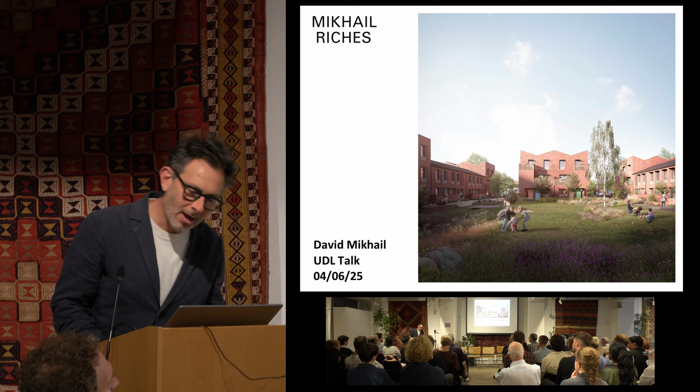I'm David Mikhail, Director of Mikhail Riches Architects. I'm going to try and keep this to 10 minutes talking about three councils building social housing: the City of Norwich, the London Borough of Hackney, and York City Council.

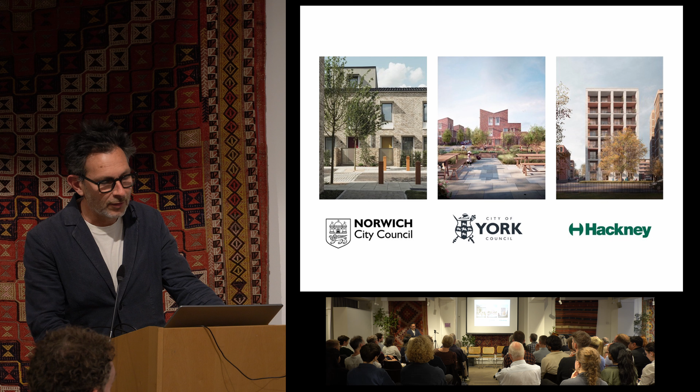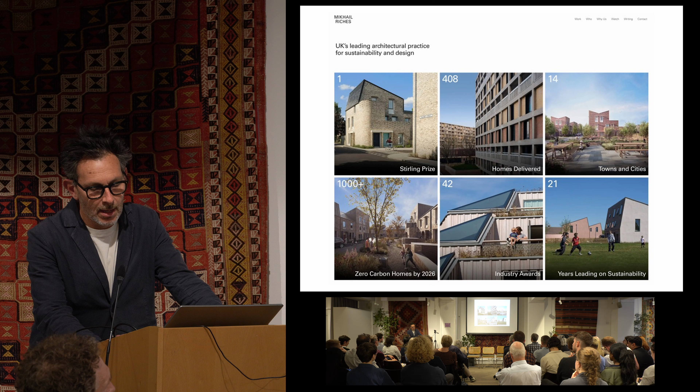This is us, Mikhail Riches, and it's probably no accident that most of our best work has been for local authorities. They seem to be the ones asking much more of their housing than most house builders. I think for local authorities, new housing can shine a light on the art of the possible, but specifically it can also meet local needs.

This is Goldsmith Street. I'm going to talk for a few minutes about this. I've got no photograph as charming as yours, Leo, but this was started in a competition we won in 2009, an RIBA competition. We were thrilled to win it.

Accordia had just won the Stirling Prize for private housing in Cambridge. I remember the first client meeting with Andrew Turnbull, our client, in a pub in Norwich, where he turned to me and said, 'We're expecting you to win the Stirling Prize, David, right?' I said, 'You're joking, right?' It was with great delight that we were able to win it many years later, in 2019.

But in 2012, the project was pulled because Lehman Brothers happened. We all remember that, I hope. Their development partners tried to value-engineer the scheme, tried to chuck us off. A scheme was tabled with cul-de-sacs and PVC windows, and luckily for us, Andrew and Norwich decided to put it on hold.

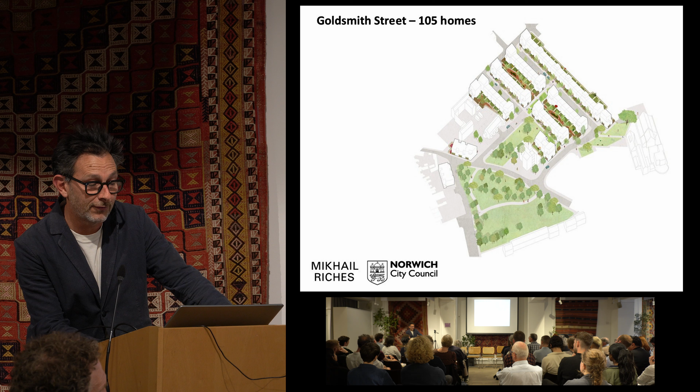Till 2014, when we got a call saying it's now just council-led. There are no development partners. It's just the council, and it's all going to be socially rented. And could you make it fully certified passive house? I was like, yeah, of course we could. That'd be lovely.

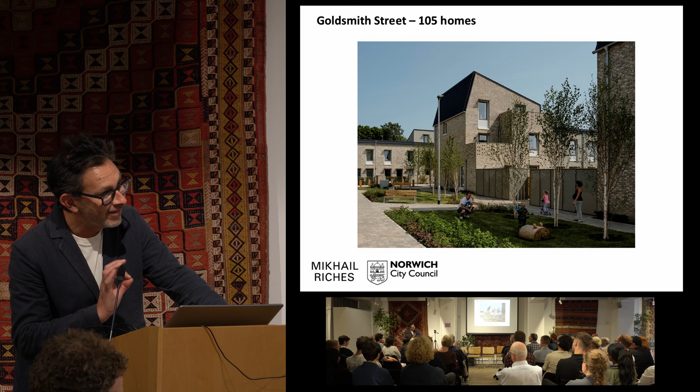Andrew, interestingly, had a conversation with his team about how to deliver this, and decided that, unbelievably, a traditional JCT contract was the way to ensure quality and to deliver passive house, which requires quite a high degree of skill. We were able to deliver this project using a JCT traditional contract, not Design and Build, on time and to a budget of £1,825 a square metre, for incredibly high quality build and for the kind of air tightness that gets you passive house.

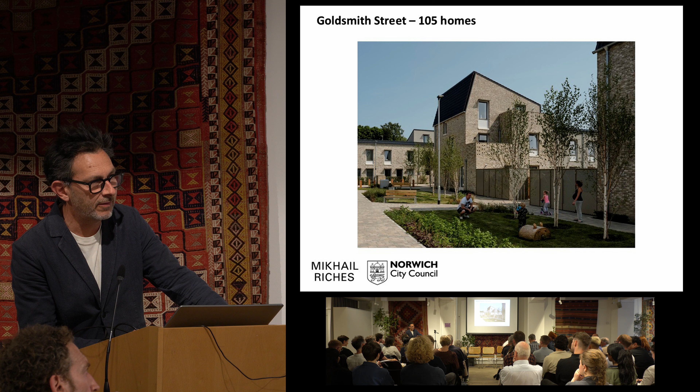So I won't dwell too much on Goldsmith Street because I think we want to talk about other projects, but Goldsmith Street, as well as being fully certified passive house, also has a very strong focus on placemaking, with 14-metre wide streets, unusually narrow, but very much in line with the historic grain of Norwich. And many socially considered spaces such as this, which is a kind of glorified ginnel for taking bins and bikes out, which we formed into something a bit more generous for children to play and to meet. It's actually one of the most successful spaces in the whole project.

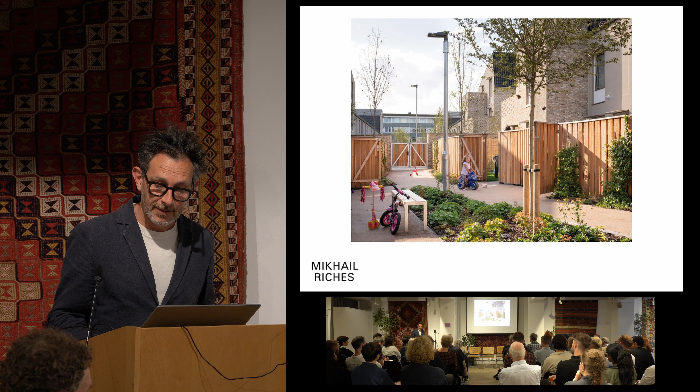To meet the density of the brief, which was 84 dwellings per hectare, we really had to combine houses with flats. But we wanted to provide flats which were like big houses at the end of terraces rather than blocks of flats. So we developed typologies where there are no communal staircases or lifts. Every flat above ground floor has its own front door onto the street. That keeps service charges very low. It means every resident, whether in a flat or a house, has a really generous area of storage on the ground floor for bikes, shoes, buggies.

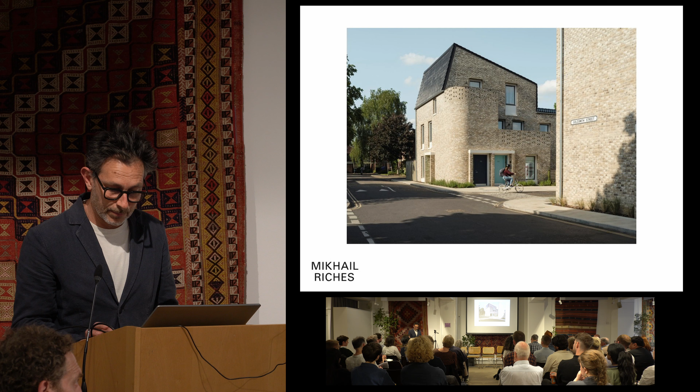So that's Goldsmith Street, finished in 2019. I'm going to move on to Hackney. In 2017, we were invited to compete for a couple of car park sites for the Hackney Housing Delivery Programme. All the sites we looked at here were close to tower blocks, with very strong local communities, and the site, Buckland Street on the left, had a series of amazing plane trees.

Buckland Street and Wimborne Street combined deliver 113 new homes for Hackney residents across 2 sites. I think it's fair to say they're 50% affordable, a mixture of socially rented and so-called affordable, and the rest are private sale to help pay for it. But the mayor at the time made a promise to residents that he wasn't going to build on green space, so this is all car parks and asphalt that we're building on.

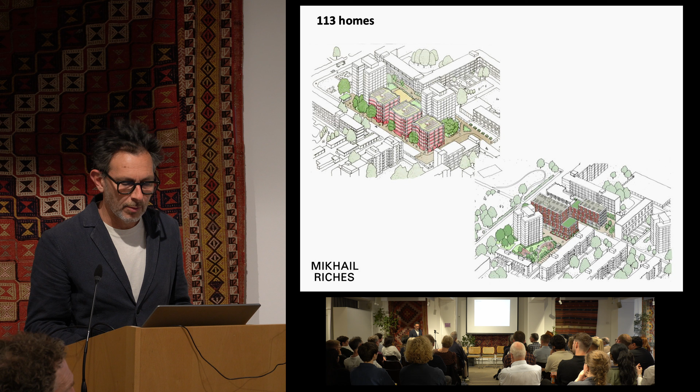So, we struggled long and hard with the brief, which called for a certain number of homes on a very constrained site, and we really wanted to keep those trees because they're so lovely. But space was tight. To the south is a tower block that you saw earlier in the photograph.

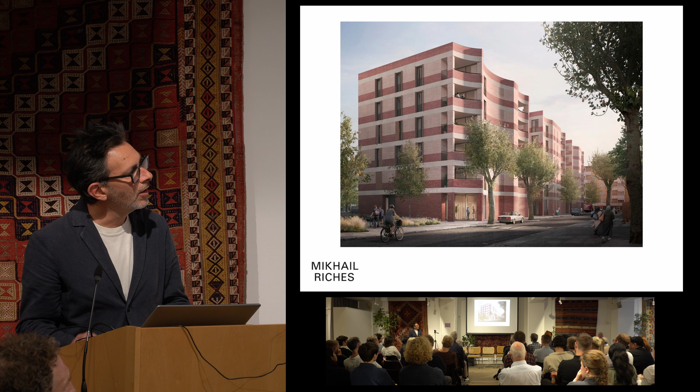So to optimise the site, to keep the trees, to give every flat dual aspect, we came up with a series of mansion blocks, if you like, 3 of them, all of which kind of gently curve around the root protection areas and the crowns of the existing trees.

Now this is a recent video, let's see if we can play it. That's from site a few weeks ago. So these projects are all on site now, due to be delivered this year and next.

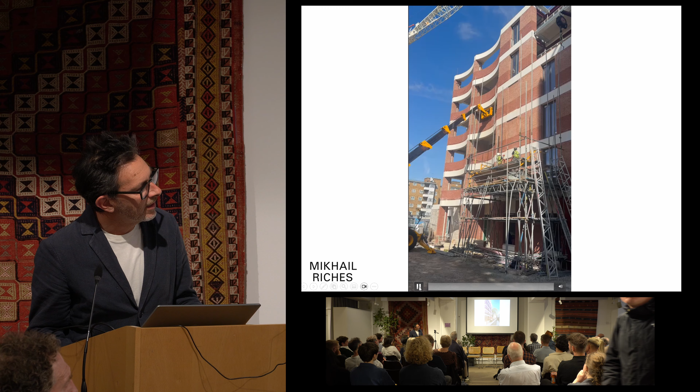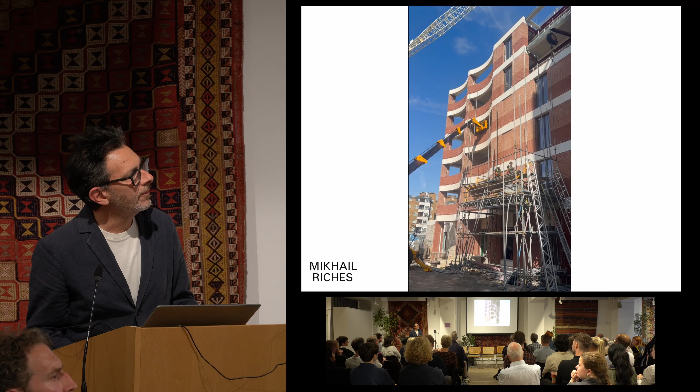So that's the south-facing facade, and this is the north facade coming up, which is curved around the trees. Prefabricated brick on concrete factory-made panels, delivered and craned on site, which has led to some masticing challenges, but anyway, there we go. I'm really excited by this project.

Oh, no, don't want that. Next one. So the other, Wimborne Street, is currently on site.

Also, here we had the opportunity of building flats overlooking Shoreditch Park. Again, sitting back from an existing tree, trying to reduce the sheer decibels of New North Road, a noisy street, but also by sitting back we were able to reveal a really lovely building you can see on the left on the corner of Wimborne Street.

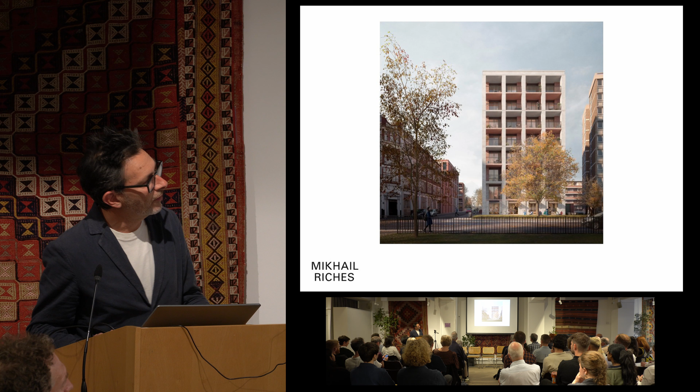So that's Hackney. I've only got 10 minutes, so I'm going to be really brief. This isn't the time for deep diving. We were on holiday when we spotted the brief for this, the most compelling brief we'd seen in a long time, so we ended up spending a holiday working through the tender questions, which you can imagine was a delight.

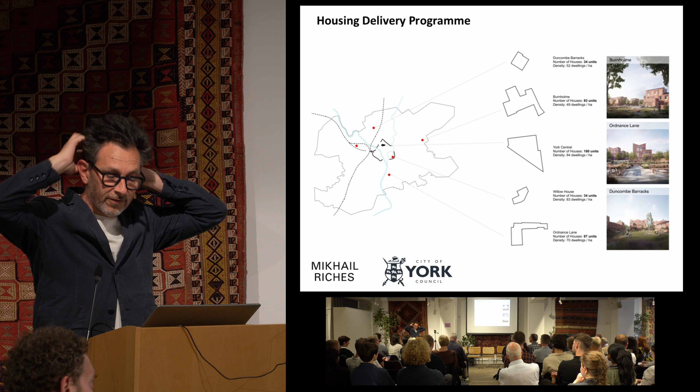But it was 700 homes across multiple sites. We would be, if we were chosen, one architect-led multi-disc team with our own team put together to deliver for York's housing delivery programme, headed up by Michael Jones, who had previously been with Rowntree, delivering Derwenthorpe, another lovely project.

We were so energised by the questions, we actually enjoyed writing the bid, would you believe?

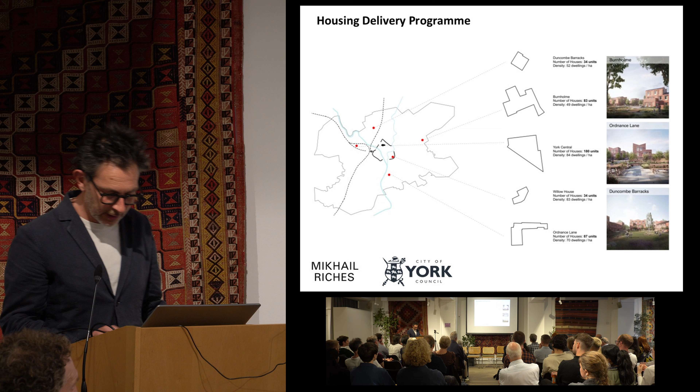And our first task with them, interestingly, wasn't to design anything, it was to help them compile what they call the design manual, which was seen as a short, pithy document which would set the bar for the York community of developers and housing associations.

Newly elected Green councillors in 2019 then influenced the brief too. They asked for us to see if we could hit net zero carbon in operation all within the red line boundary. Incredibly challenging. And that's based on the RIBA and LETI model of net zero.

I'm going to walk you through some of the schemes now. This is Duncombe Barracks. It's a square site. We've developed it as a series of flats, walk-up flats, similar to Goldsmith Street, but kind of combined into a pavilion in the middle.

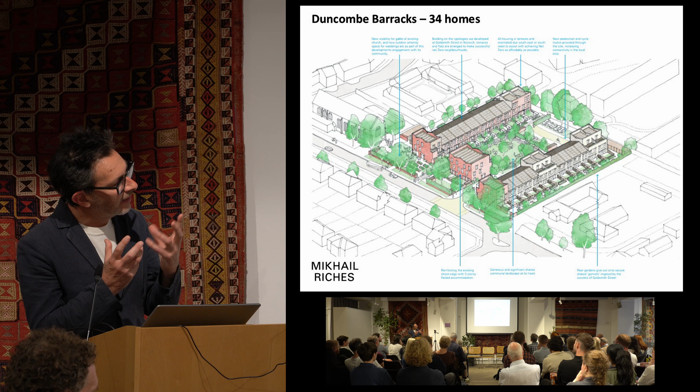Walk-up flats front onto the street, and behind it are terraces of houses facing onto a shared play space courtyard, very reminiscent of a nearby almshouse over the road.

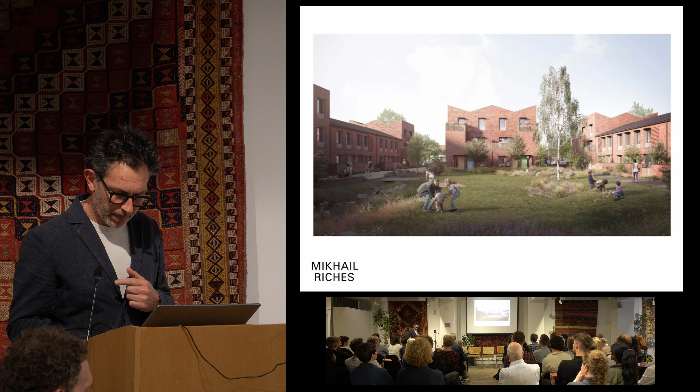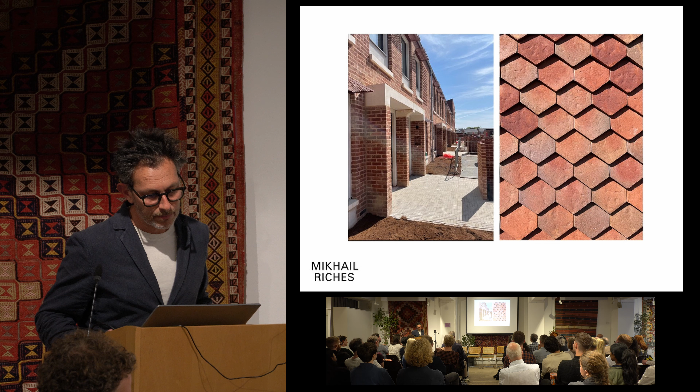Some of the elevations there. And these are some pictures from site this month. So simple forms, a lot of care taken in material specification and detailing.

And again, I should stress, this is passive house, but with knobs on. So this is passive house and enough generation of power on site to deliver net zero.

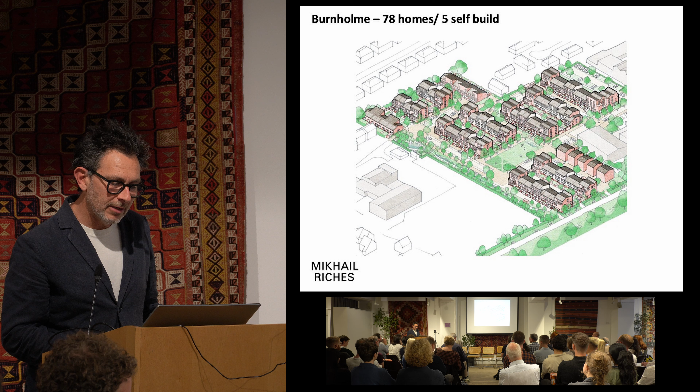This is Burnholme, 78 homes, 5 of which are self-build. Again, a series of 14-metre wide streets which share some of the DNA of Goldsmith Street, but making it a bit more York, with some really innovative typologies which have been nuanced around local needs in particular.

So, for example, this is an end of terrace house which satisfies - there's a very celebrated special needs school just over the road where children are currently being bussed in from as far away as Scarborough.

And so this is a house, a series of houses which are M4(3) over 3 stories. There's also a bungalow typology for the older generation and a multi-generational house type with a 4-bed duplex sitting above a 1-bed flat.

Finally, because it is just 10 minutes, how are we doing? You've gone over. Oh God, so I'll just very briefly... It's quite all right if you just want to... I'm wrapping up, this is the last... It's very hard to interrupt a Stirling Prize winner, everybody, so don't.